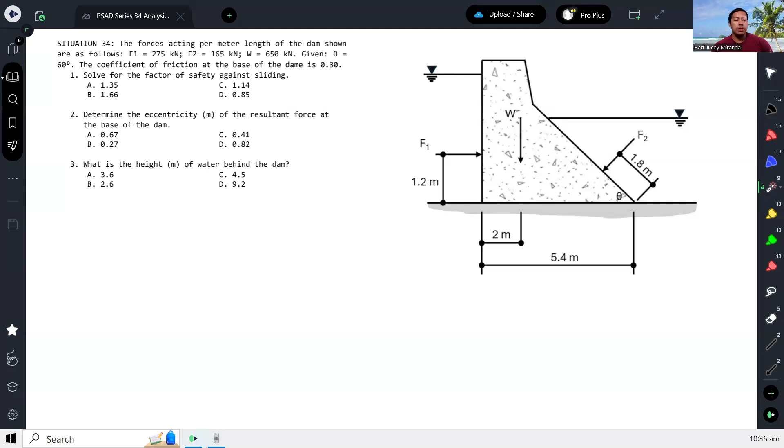So the forces acting per meter length of the dam shown are as follows: you have 275 kilonewton na F1, and then 165 kilonewton na F2, and then the weight is 650.

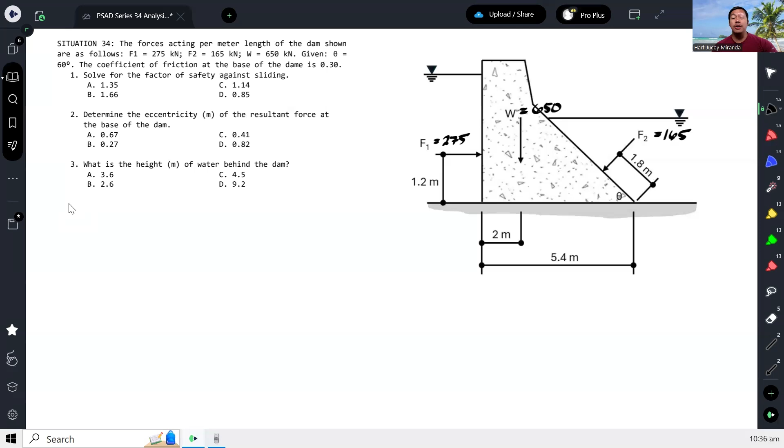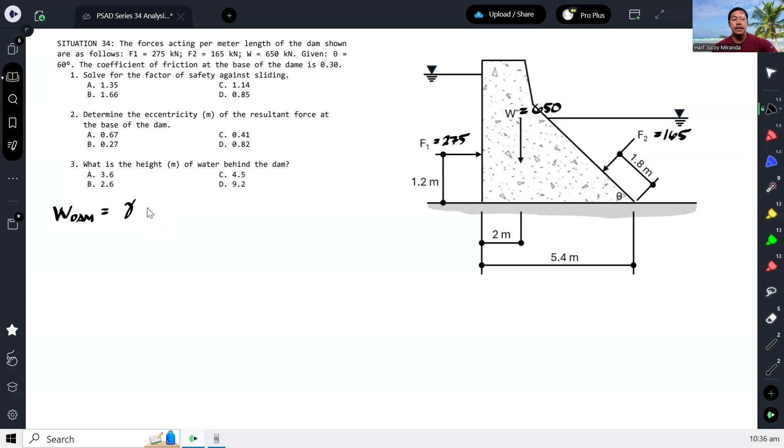Dito ang maganda ay given na yung weight ng dam. Pero just in case na hindi given, normally ang ginagawa is you multiply the unit weight of the material of the dam with the volume. Normally kasi yung dam ay concrete, so unit weight ng concrete. Ganyan normally kinukompute.

Pero given na, so no problem, mas madali. Given na rin yung mga location, given na rin yung location ng weight. Ang isa pang challenge dito kapag hindi given yung location ng total weight, magbabalik tayo ng theorem.

So hahatiin pa natin to sa rectangle. Tapos ito, meron tayong triangle na maliit. Tapos meron pa tayo dito rectangle na maliit. O di kaya pwede pagsamahin na lang yun - isang buong rectangle, tapos isang maliit na rectangle sa ibabaw, tapos triangle, and then yung natitira dito na triangle. Medyo mahaba-haba pagka hindi pa yan given, pero given na naman, kaya that's good, mas madali.

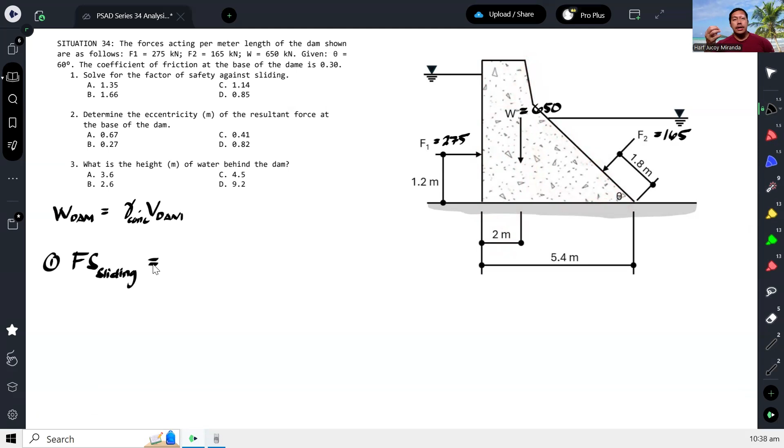Solve for the factor of safety against sliding. So pag sinabing factor of safety against sliding, it simply means na gusto natin kunin yung ratio. Pag sinabi kasing factor of safety, yung ibabaw niyan palaging ano eh, yung capacity, no, yung kakayanin divided by yung required.

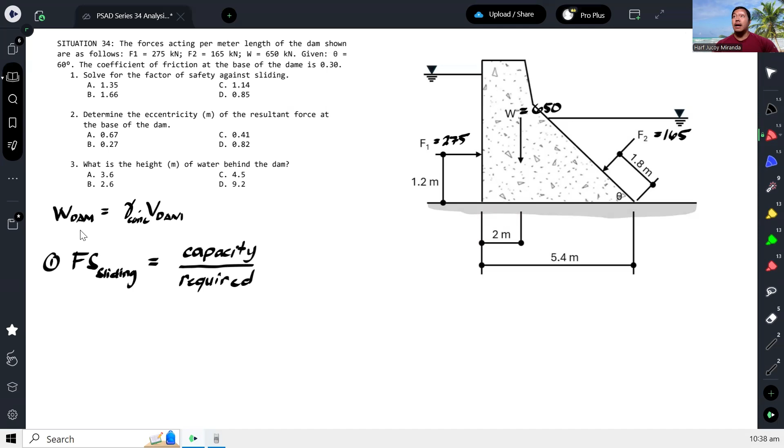Itong capacity dahil sliding, alam naman natin the reason why this will slide is kapag na-overcome yung friction. So ito will represent friction, force na maximum - yung pinakamalaking friction force na ma-develop.

Divided by, yung required is yung total force horizontal. Kung ano yung total force horizontal, yun yung magiging requirement natin - kumbaga, yun yung kailangan pigilan ng friction.

So ang idea din, kailangan yung ratio na to ay hindi bababa sa 1, kailangan mas malaki sa 1. Kasi kapag bumaba yan sa 1, ibig sabihin yung capacity natin mas maliit sa required, e di ibig sabihin gagalaw na ito, magsislide na yung dam natin. Anyway, that is just for design criteria, pero in this particular problem, we are just simply asked what is the factor of safety.

Nga pala, 'di ba ang friction force is yung maximum is the coefficient of friction times the normal reaction, divided by itong total force horizontal, tawagin natin na Rx. Rx means yung parang resultant na force acting along X, kasi horizontal. Tapos yung N na to, reaction yan - normal reaction, tapos ito yung friction.

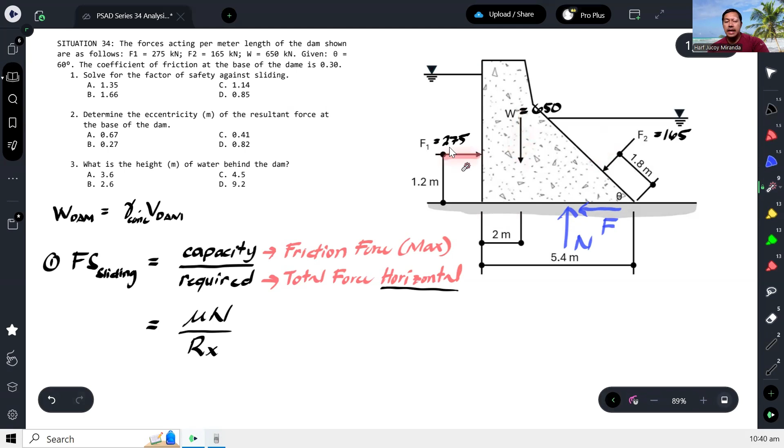So, normal reaction na yan, kapag nag-summation of forces ka, yung normal reaction na yan ay magiging equal lang sa y component nito plus yung y component nito, tapos ito wala namang y component. So equal lang siya doon. Pag pinagsama natin yung mga forces na y, we can actually designate that to be the y component of the resultant force acting on the dam. Kaya mangyari, yung N natin will be equal to Ry, or yung Y component.

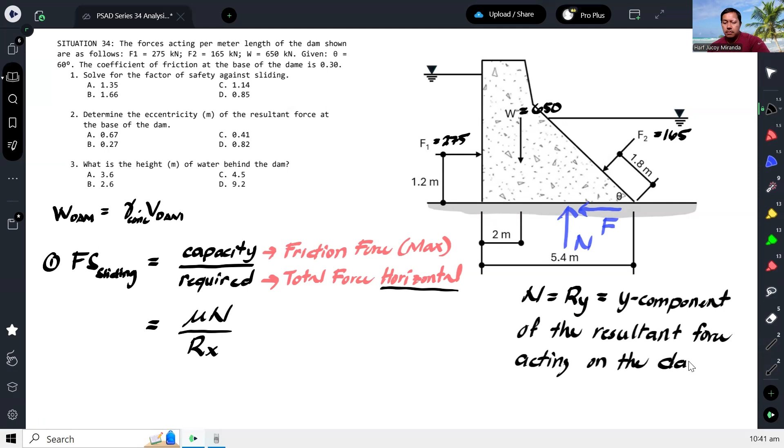Okay, kaya ang mangyari, yung factor of safety against sliding, nagiging ganito: mu Ry over Rx. Okay, and for some of you, baka kinakabisado ito bilang formula, pero para sa akin hindi. Kailangan naintindihan natin kung bakit, ano yung factor of safety, para saan yun, at saka ano yung definition nun. So kapag alam mo yung definition, hindi mo kailangan kabisaduhin dapat yan.

Okay, pero if this is how it was presented to you during your college, ganyan, yan yung factor of safety against sliding, at least alam na natin ngayon kung saan saan galing yon. Okay, kaya pwede mo yan kalimutan. So galing na to sa mu n, ito naman yung total horizontal force na tutulak dun sa dam.

Okay, so for this problem, if we would take summation of forces, ako nga pala, lagyan natin ng angle. May angle pala to, 60 degrees daw to. Okay, so kapag 60 degrees yan, hindi ba ito 60 degrees? Ayan, kasi perpendicular yung F2 eh.

Automatic yun, perpendicular. So let's solve for Rx, the resultant force acting on the dam. So summation of Rx is equal to summation of forces along X. Okay, so that is the resultant.

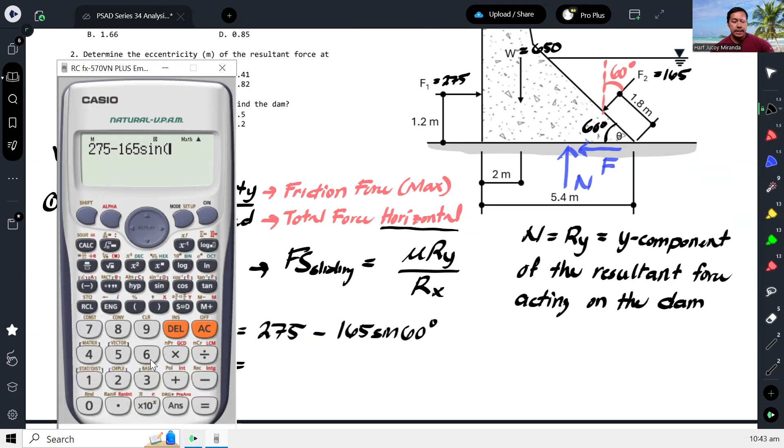Acting along Y, so that would give us Rx is equal to 275. Gawin ko na lang to the right is positive. Tapos minus yung x component nitong 165, so 165 sine of 60. So that will give us our Rx: 275 minus 165 sine 60, so that's 132.11.

Kilonewtons. And then for Ry, ganun ulit. Actually, pwede kayo mag-summation of forces, pwede kayo mag-equilibrium analysis, summation of forces y equals to 0. Tapos ang hahanapin mo yung normal force, yun yung in place dito. Pwede yun, pero kung gusto mo naman, resultant analysis, pwede rin.

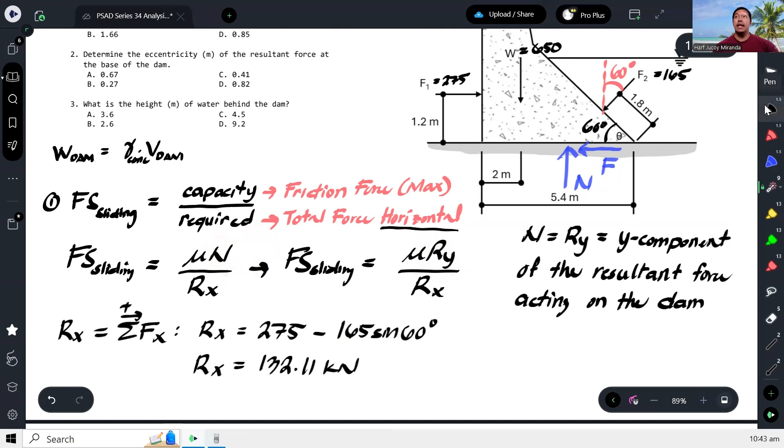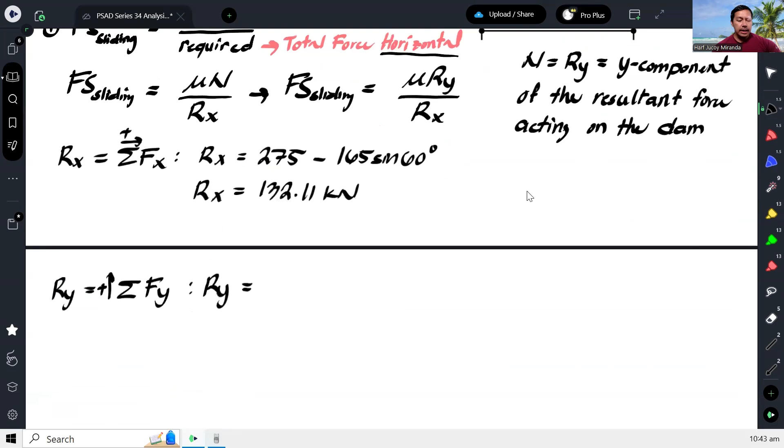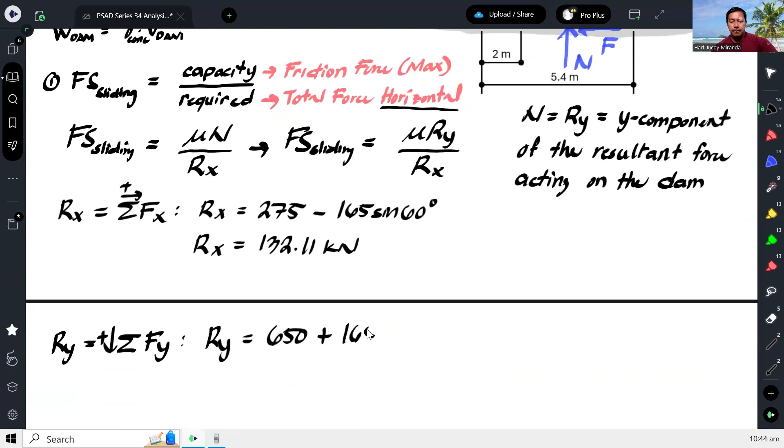So Ry is equal to summation of forces y, assuming upward positive. And that would be equal to, ano ba yung mga y? O nga pala, gawin ko na lang na downward positive itong Ry, kasi nakikita ko sa given, downward naman lahat ng nasa y. So gawin ko ito downward positive. So Ry is equal to, downward yung 650, tapos downward din yung y component nitong 165, so 165 cosine of 60. Okay, and that's your Ry.

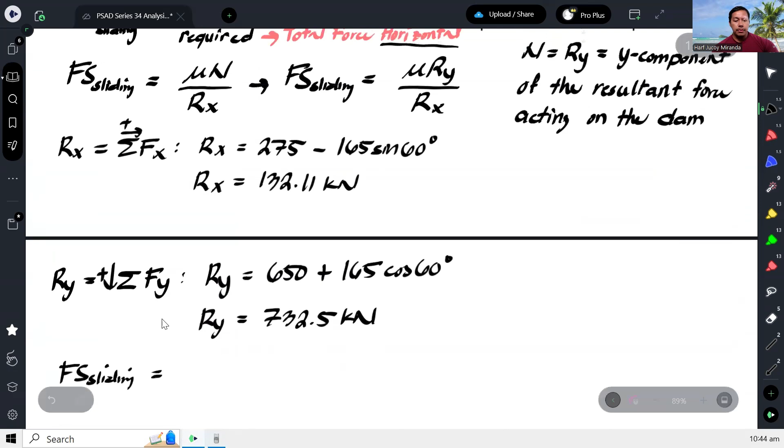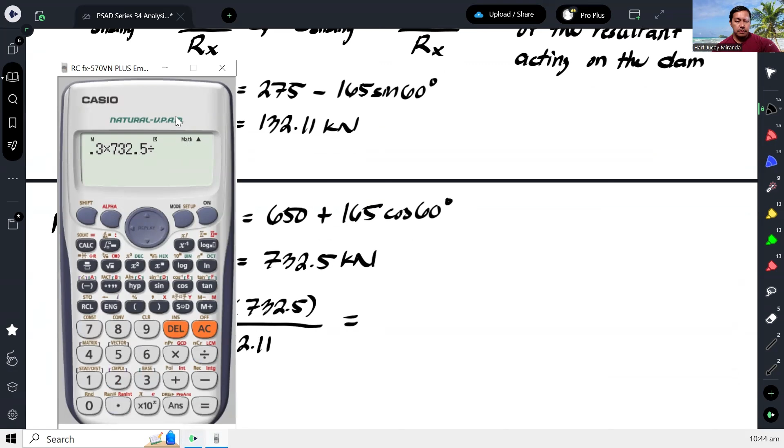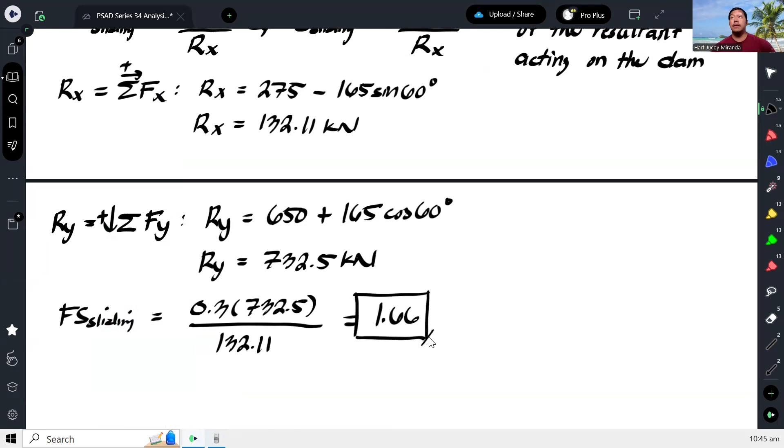Okay, so we have 732.5 kilonewtons. Now, lumalabas, yung factor of safety natin against sliding will be equal to mu, which is 0.3, Ry is 732.5, over Rx na 132.11. And that gives us 1.66. Okay, from the value itself, this is telling us that our dam is safe against sliding. So the answer is letter B.

Okay, so ulitin ko lang. Kung halimbawa na hindi mo to kabisado, ang analysis lang dyan is dapat yung net force acting horizontal divided by yung frictional force, yung maximum allowable, sorry, baliktad pala. Yung maximum frictional force divided by yung net force na horizontal. Pag kinuha yung ratio nun, kailangan greater than 1, at yung ratio nun, that defines the factor of safety against sliding.

Okay, all right, next, number 2: determine the eccentricity of the resultant force at the base of the dam. So yung resultant force, di ba meron niyang RY tsaka RX. Okay, tinatanong sa atin, nasaan daw yung location nitong result? Kasi ang resultant niyan parang ganito eh.

Ayan, yan yung resultant natin. Okay, pero dito tinatanong, what is the eccentricity? Pag sinabi eccentricity, yung layo nung location from the centroid of the base. Which is, ang centroid lang naman ng base, ano to eh, rectangular lang to sa ilalim eh, kasi ang dam natin, pahaba yan eh. Pag ganyan yan. Okay, so rectangular lang yung ilalim niya.

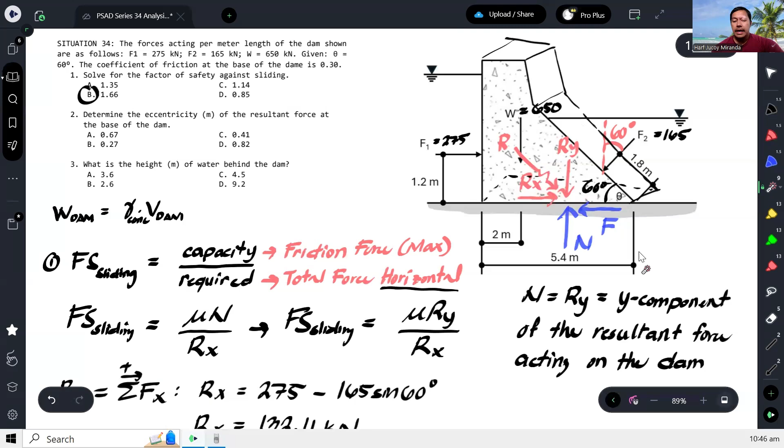Rectangular lang yun, so kalahati lang ng 5.4. So bali, hanapin natin nasaan yung location nitong RY or kahit itong N, parehas lang yan. Yung N natin, di ba, equal sa Y component ng resultant ng mga force acting on the dam. Okay, so hahanapin naman natin to. Gaano yan kalayo? So tawagin natin X bar. Pero ano, eccentricity tinatanong niya. So yung layo niya from the middle.

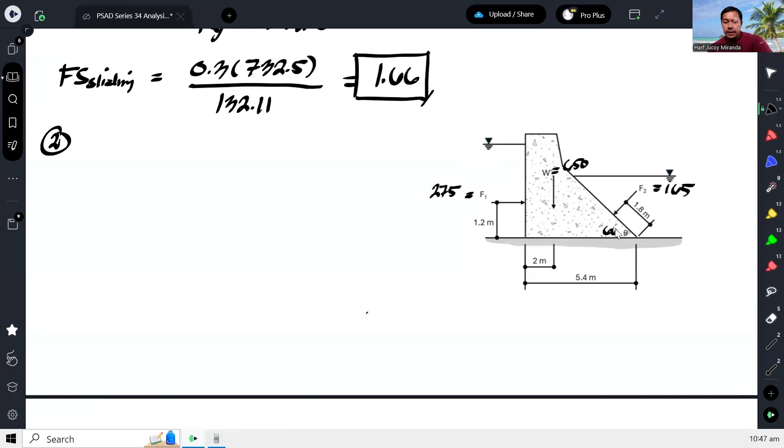Okay, so for number 2: this is 165, this is 275, and then this is 650, this is 60 degrees. Okay, so pinapahanap yung eccentricity. So again, you could analyze yung normal force or yung RY na lang, RY and RX.

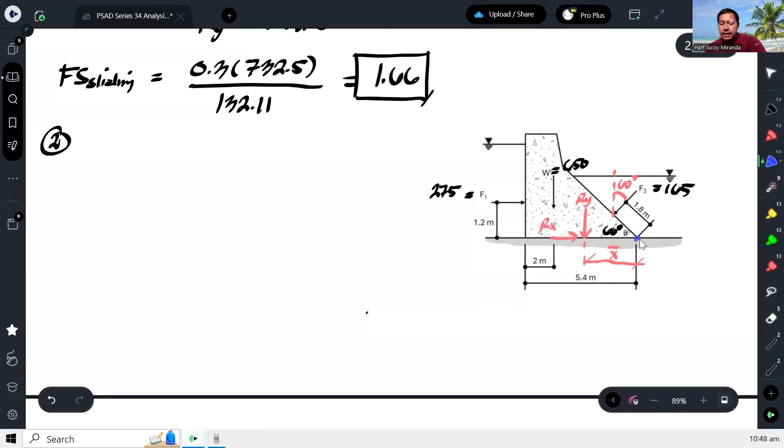Okay, and this distance we will call X bar. So to get X bar, we will take the summation of moment at the toe.

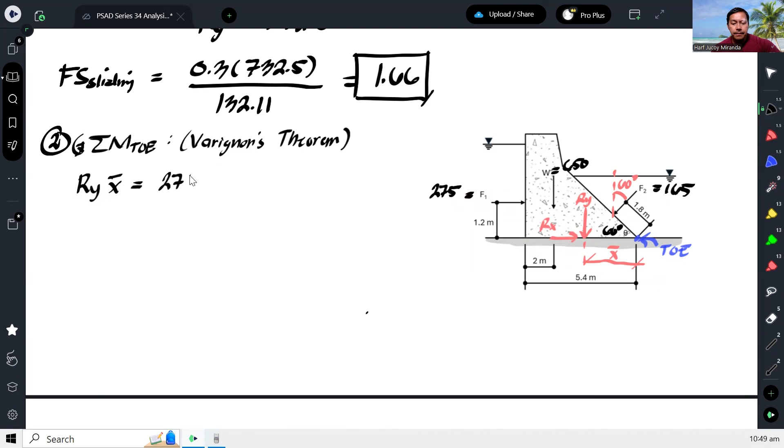On the right side, we have F1, which is 275, with moment arm 1.2, and its rotation is clockwise. Then we have W, which is 650. Its moment arm from the toe is 5.4 minus 2, so 3.4, and its rotation is counterclockwise.

And then F2, no need to get components since we know the perpendicular distance, which is 1.8, from the toe. The rotation of F2 is also counterclockwise. Okay, and that's it.

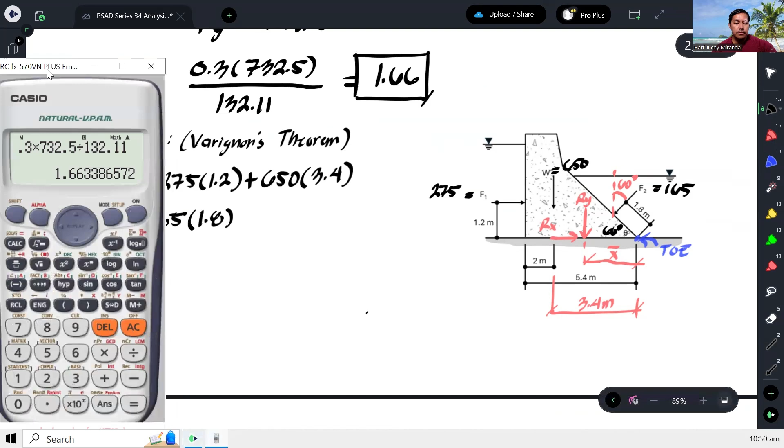So again, RY we already know equals 732.5, so we can get X bar. Negative 275 times 1.2, plus 650 times 3.4, plus 165 times 1.8, over RY which is 732.5. That gives us 2.97.

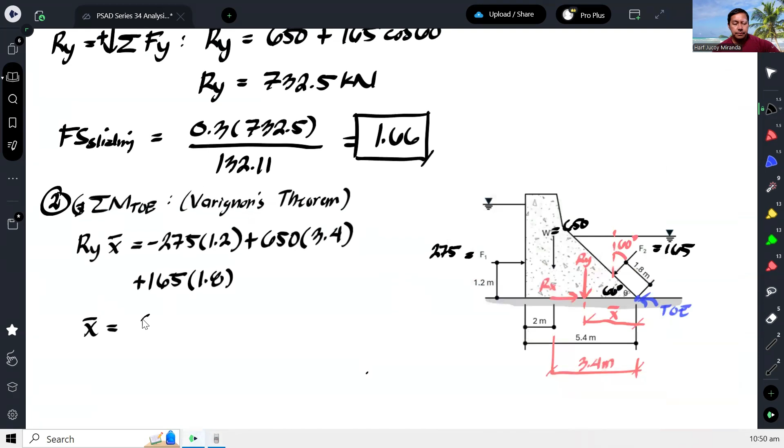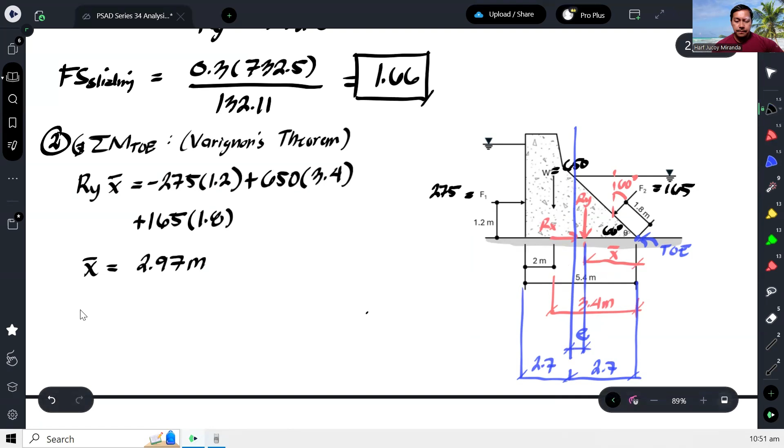But once again, the eccentricity is the distance from the centroid. So what we're actually looking for is this. This point here is half of 5.4, which is 2.7. So this E is equal to X bar minus 2.7, or rather, this distance is X bar.

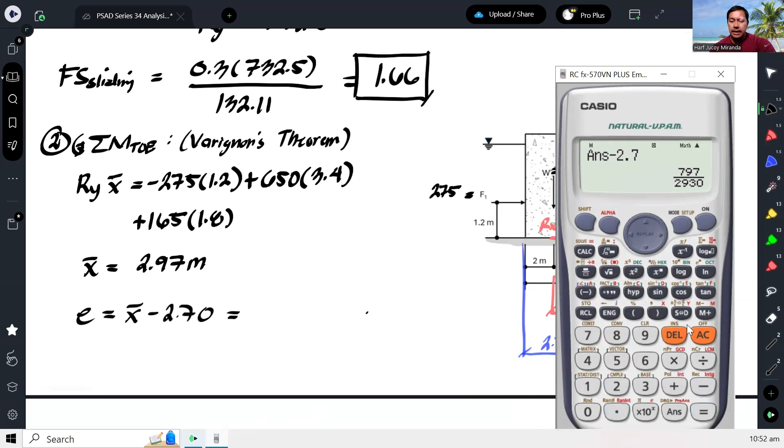And that would be our answer for number 2.

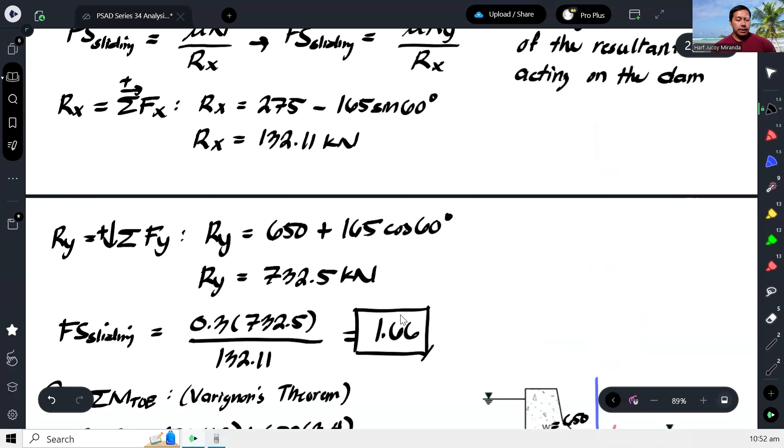And lastly, what is the height of water behind the dam? For number 3, I will do this quickly. We just need to find this height.

When it says behind the dam, we are assuming the upstream side, at the back. We already know the location of the resultant hydrostatic force, since the pressure distribution is triangular. Because it's triangular, this location, this 1.2, should be at 1/3 of H.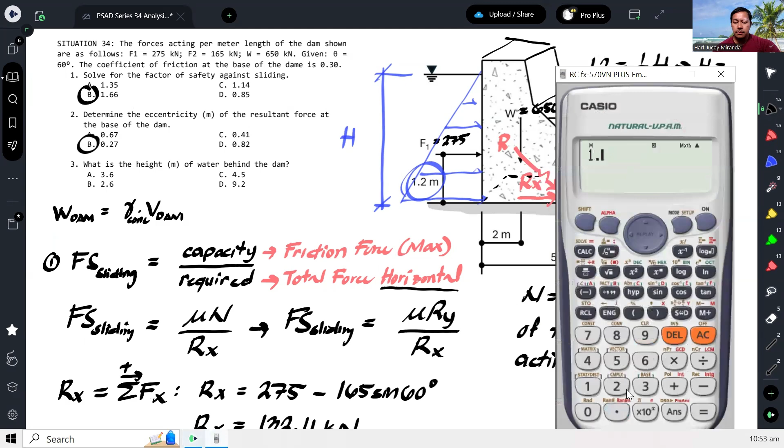So 1.2 should be 1/3 of H, therefore H should be 3 times 1.2, which gives us 3.6. So for number 3, the answer should be 3.6.

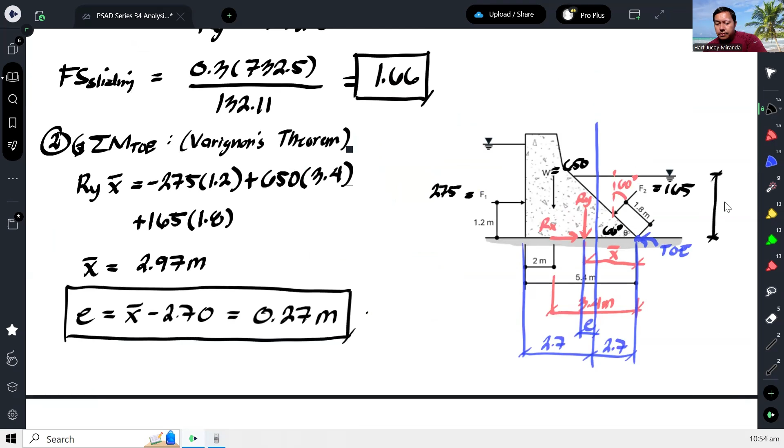Just in case the question asks, what is the height of the water on the downstream side instead? What is the height of water here? Just in case that's the question, let's work on this here. So height of water here.

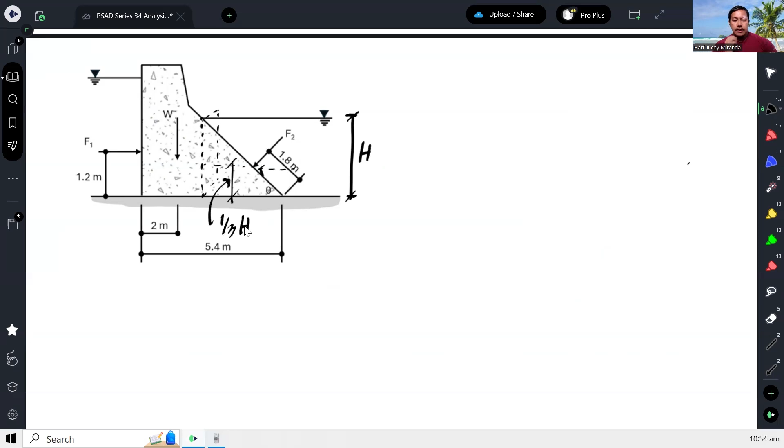The idea is similar: the vertical projection of the area of the dam, this horizontal force, should again be acting at 1/3 of the height. And to calculate this height, we will consider this triangle.

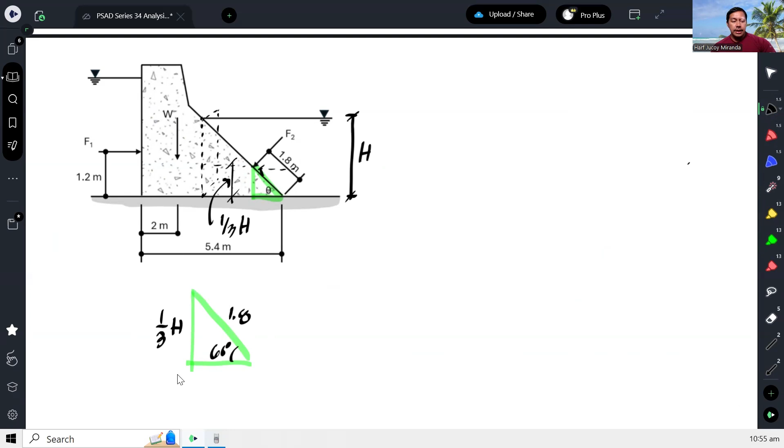Let's enlarge it. This angle is 60 degrees, then this is 1/3 of H, and this is 1.8. As you can see, if we apply sine of 60, that equals 1/3 of H divided by 1.8, so now we can solve for H.

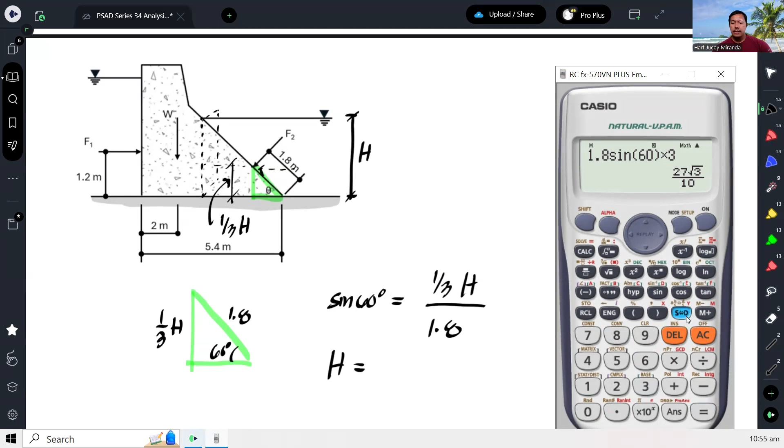That is the depth of the dam, the height of water on the downstream side: 1.8 sine 60 degrees times 3, which gives us 4.68, the height of water on the downstream side.